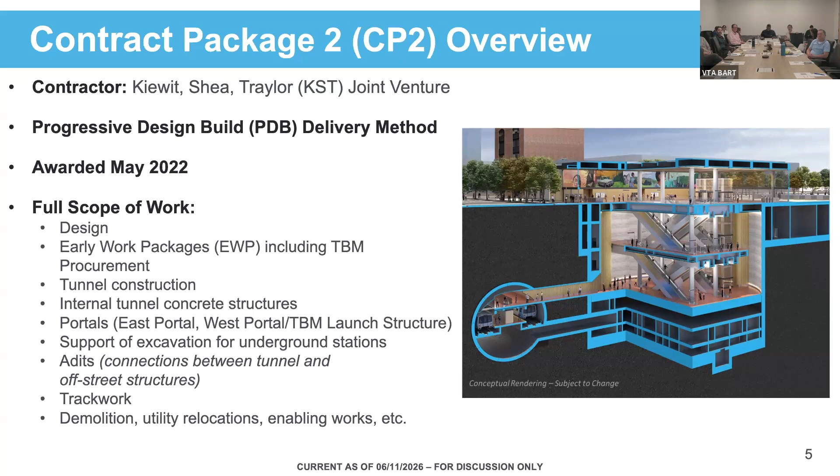Initially we awarded this contract in May of 2022 for a very large amount of scope. All that you can see there constructs everything highlighted in blue in the cross section on the right side under a progressive design build contract.

Over the last couple of years, we've reported out here, and just to reiterate, there's several activities that have taken place tied to this tunnel contract, starting with a contract task force that was requested by the board for the program to establish as we were negotiating our price for the lump sum price for stage 2 for the construction of the tunnel with KST.

Our prices were far apart. We, in addition, completed industry outreach to understand from contractors what scope they would be interested in if the full CP2 was repackaged. It culminated in the recommendation to the board to off-ramp the KST and to seek a new tunnel contractor while they continued the work of the launch structure that they're working on right now.

In August, we held an independent peer review with representatives from Sound Transit and LA Metro who highly encouraged us to try and go back to KST and make things work. In addition, KST came back and said they were interested in continuing conversation. And so all the while that all of this was happening, the West Portal work has been underway, going really well, on time and on budget.

As things were going well and the cost was our only challenge with them, we started more serious conversations, which also has led to additional early works activities that we've been talking about and are going to be advancing to help manage the critical path.

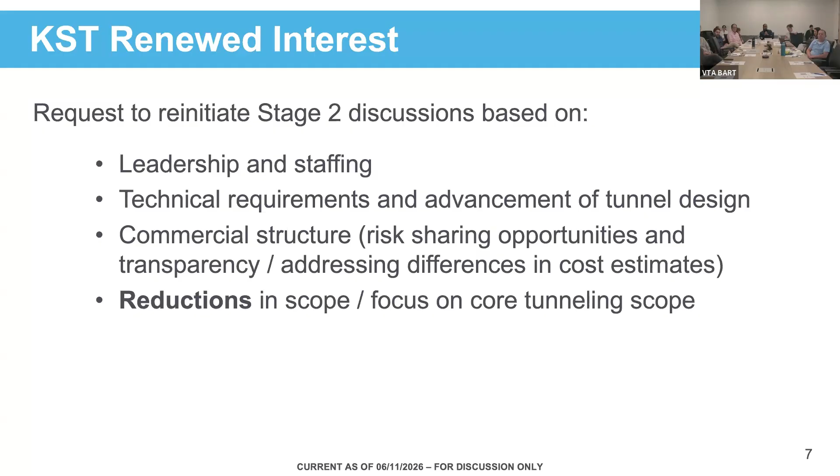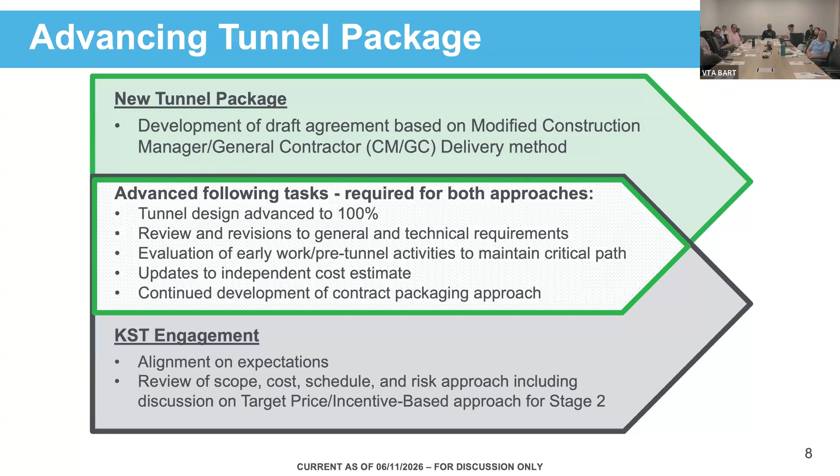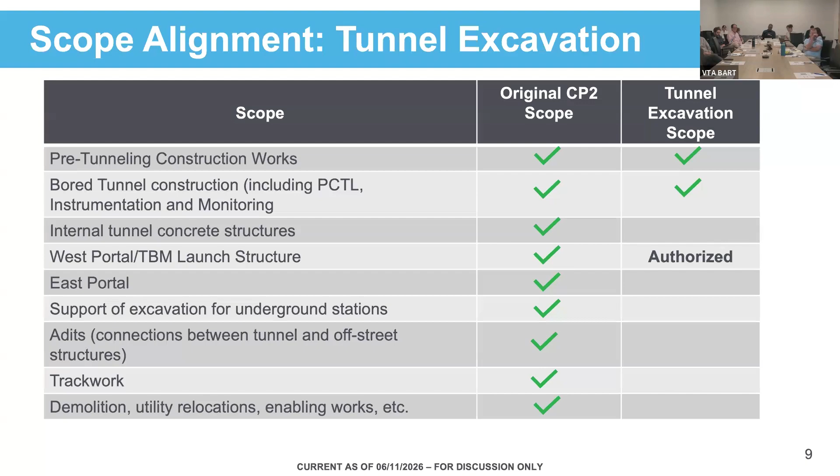So this new commercial structure, target price incentive based, has a number of benefits to VTA. There's typically a lot of risk with underground construction under a lump sum model, and this risk is priced in as contingency, increasing the overall cost of the job. With this target price, the risk is not priced in, and VTA only pays for it if it occurs. So this contract has a pain share and incentive-based gain share element to it. Basically, a portion of their fee is at risk, and they're only eligible for it if they're able to meet key performance indicators on cost and schedule and a couple other items.

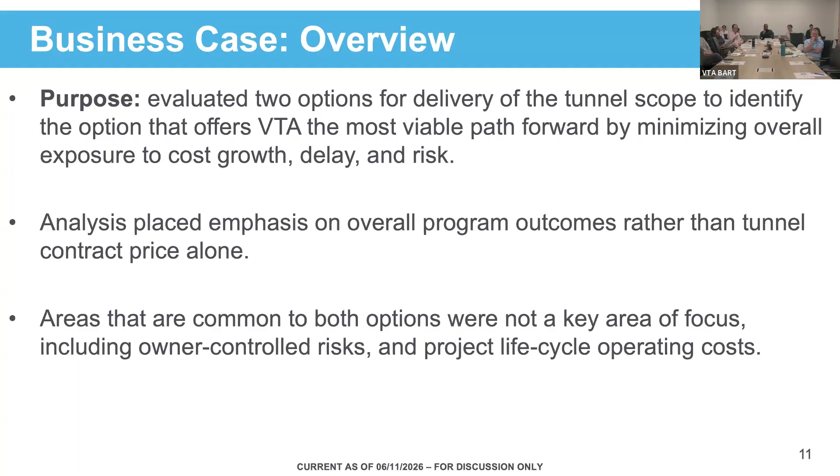So looking at this, to determine the best path forward for the program, we did what we call a business case, evaluating the two delivery paths: a new tunnel procurement or an amended and restated agreement with KST. This analysis included cost, schedule, and risk, rather than just cost alone. Because the tunnel is on the program's critical path, the decision must reflect total program impact, not just the contract price of the tunnel alone.

So here are the two options considered: amending and restating the agreement with KST under a new target price fixed fee incentive-based commercial model, or bringing on a new tunnel contractor.

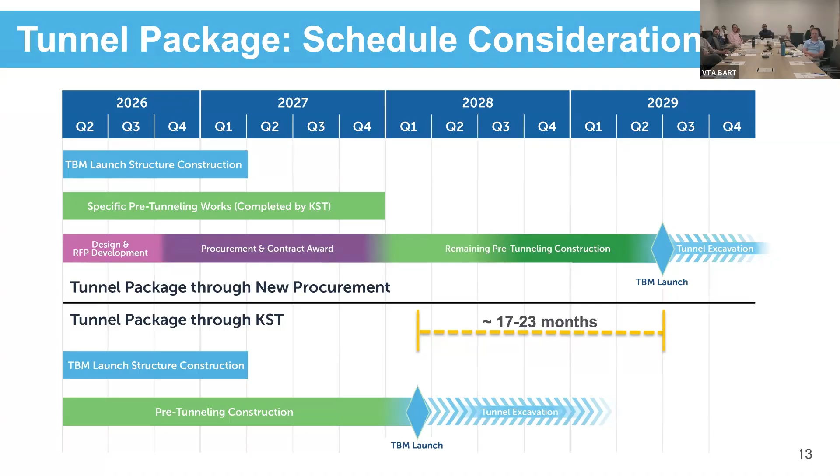This came into consideration. A big one being VTA would have to take on the liability of providing an owner-furnished tunnel boring machine, because KST has procured and designed the tunnel boring machine for their job. VTA paid for it, but they are owning the machine, so if we were to off-ramp them, VTA would need to retain ownership and take on the additional risk of another contractor using that machine.

So these were all things we knew about, or many of them, when we went into the off-ramp, but at the time that's what seemed like it needed to take place. As we're evaluating now, the tides are turning a bit. We've come back, and this basically summarizes what the business case concluded.

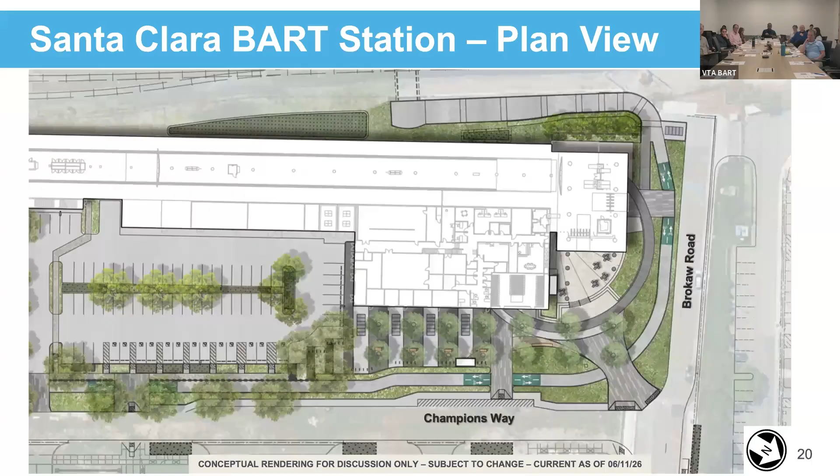And again, we heard from the group that part of one of the elements of our design is really to have a signature tree in that plaza, and the location of that tree. We presented a couple different options last time we met. We're still evaluating that a little bit. We want to make sure we get the improvements on the pavement and all the ground areas delineated and a bit more advanced before we bring that back to you. So we'll be doing that next month, and I believe that's going to be on July 23rd. So we'll have a little more integrated feedback for the group to take a look at.

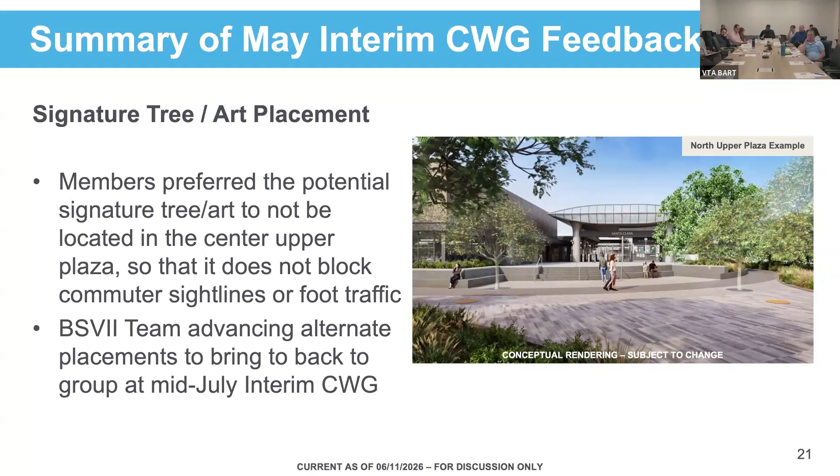Also looking at maybe where some of those art locations could be. I know we talked about some of the medallions and things like that, so we'll have further discussions on that next month.

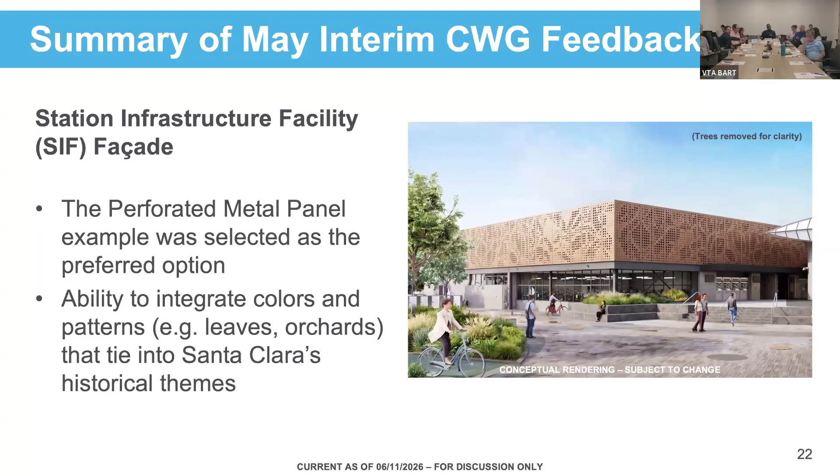Same with the perforated metal panels. We did show this one — this was kind of the preferred option by most folks. We did get some varying opinions on whether we wanted that perforated panel to stand out or whether we wanted to go with the flat metal panel. So appreciate everybody's feedback, but we will come up with a couple different alternatives to this perforation. We have time to facilitate exactly what those perforations are. This was just a sample, and again there's a lot of different ways to go about having that standard integrated insulated metal panel with some perforations and design elements in it.

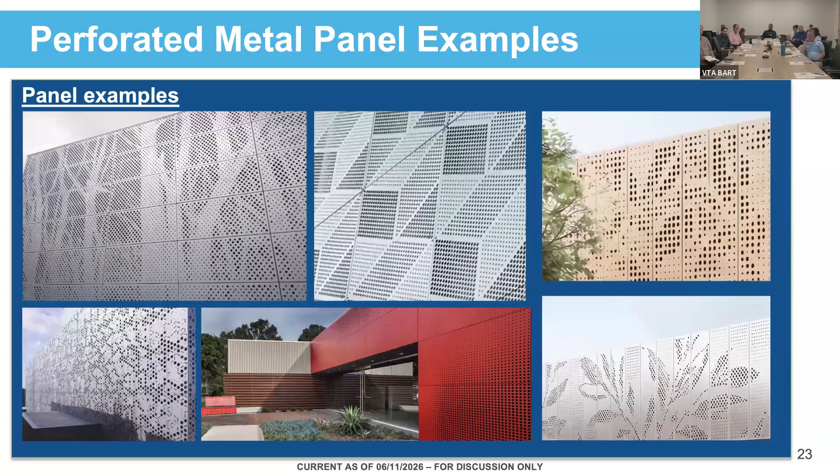On the left side, the four pictures are existing facilities, and on the right side there are a couple different renderings. The original rendering we showed on the right is kind of that golden area, and then we started to look at some alternatives in terms of color as well as pattern. That's the lower right, to maybe bring in more of that natural leaf motif that we've been working with the group on.

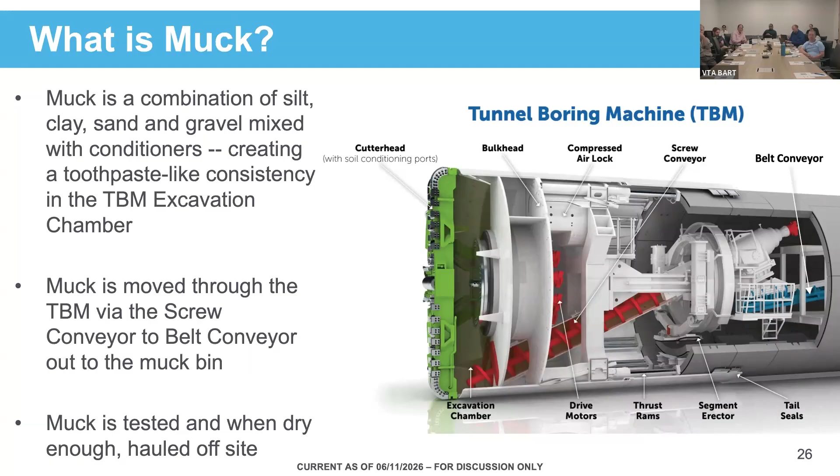Then it goes onto a conveyor system back into the yard in what we call a muck bin, where it's stored before it's hauled off. I don't know if I know how to get these to play.

So there's a couple examples here, two short videos to see how the material will move. On the left, that's very typical of how the material would move. You can see the material is somewhat dry in the left example. If you run the other one, that's a little pastier example of material, how that will come out. So that's what the machine creates and then takes to the muck bin.

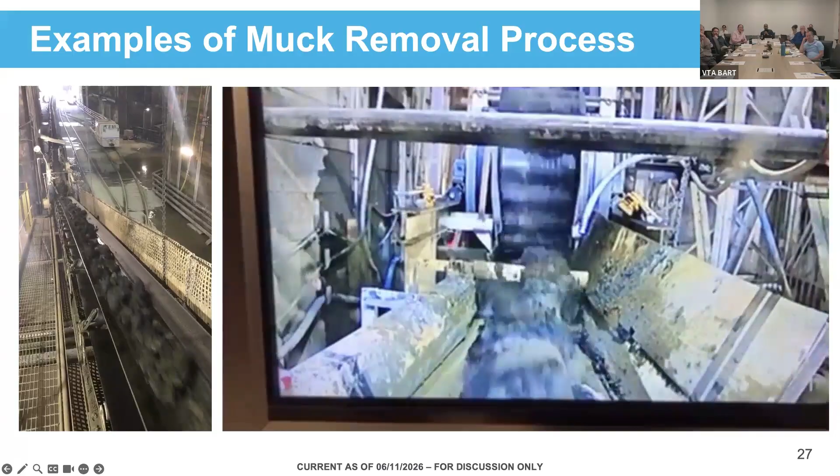Right now, and historically through the environmental document, the assumption is it'll all be hauled off by truck to landfills or quarries. That's the base condition. We know we can do that. That's been environmentally cleared, and that's kind of the ground level simplest way to deal with this.

We are pursuing options to make sure we have alternatives and looking for a more efficient way and perhaps less costly way to move the muck. So we'll talk about some of that here.

So one is just to reduce what's called the tipping fee, the fee to dump the material wherever we take it. We've been working with what are the former salt ponds out in the Alviso area, and we've had some good success there. We'll talk about that, but they want material very badly out there to restore the ponds to marsh area for both environmental purposes as well as flood management and management of sea level rise out in that area. So the regulatory agencies are very interested in this material to fill those ponds up.

We've also talked with two quarries in the area, Stevens Creek and Lehigh, otherwise known as Permanente Quarry, over the years, which are both up in the foothills above Cupertino. So we've been talking with those two entities.

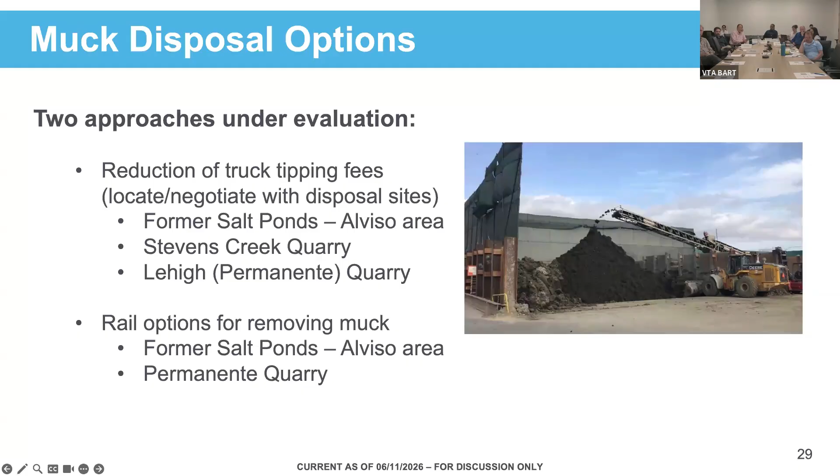And then we've also been looking at rail options for removing the muck. The rail options are really applicable to the salt ponds, the former salt ponds, as well as Permanente Quarry, which has historically used rail quite a bit over the many decades they've been operating up there in many different arenas. So the rail still goes there, and they still have quite a bit of space up there. So those are the two opportunities that we've been pursuing and talking with the different entities for quite a while now.

Just to get you some perspective of where they are relative to the project, the project is the blue line at the bottom. You can see on the left where the Newhall Yard is, that's where we'll be generating the material. In this exhibit, we show the ponds areas. As you can see, there's a lot, they actually circle pretty much the whole bay, the South Bay anyway. We would be looking at A4 at the very bottom left, A8S, A12, and A13.

We have 4 million plus cubic yards of material that will be generated by the boring machine. That is more than either A4 or A12 could handle combined. So if we take all the material up there, we would need A4, A12, some of A8, and some of A13. And we're working through where the best place is. There's different ponds, areas that have different status relative to their post-use conditions. And actually the different entities are kind of talking up their need, so we have some competition going on up there for the material.

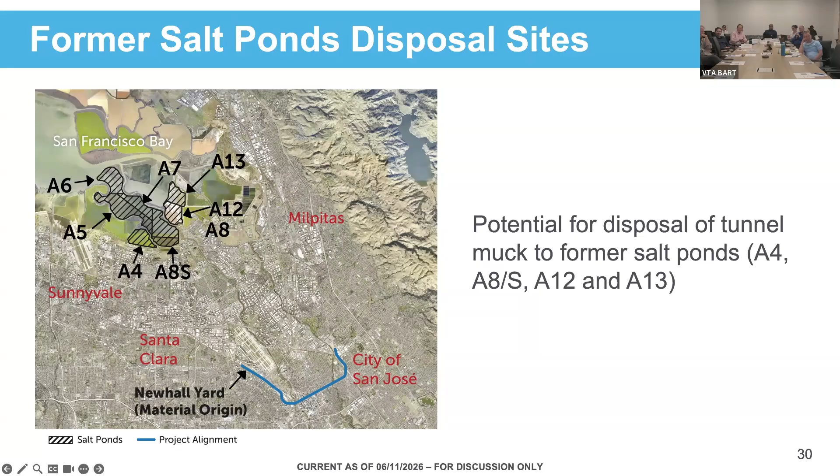In terms of the overall, it's a whole different environmental process that we're going through for the beneficial reuse of the material. That environmental document is well underway. We're looking to wrap that environmental document and get environmental clearance to put the material in those former ponds next year, mid to late summer of next year.

We did get approval from the regulatory agencies. We did quite a bit of testing all along our proposed alignment for the tunnel, tested that material, and then did some additional tests with the conditioners that are added to the soil, and tested that. We got letters from the two primary environmental entities that they would accept the material in the ponds. That was really good news. We got that in the last couple months.

So at a minimum, we'll be able to truck the material there. We are now testing for if we do rail movement of the material to build spur tracks up right next to ponds A12 and 13. In order to build the rail spurs there, we have to remove some material and then build up from a solid foundation to place the rail spurs. We're testing that material with the hope that we can just take it out from where it is and put it directly over a levee into A12.

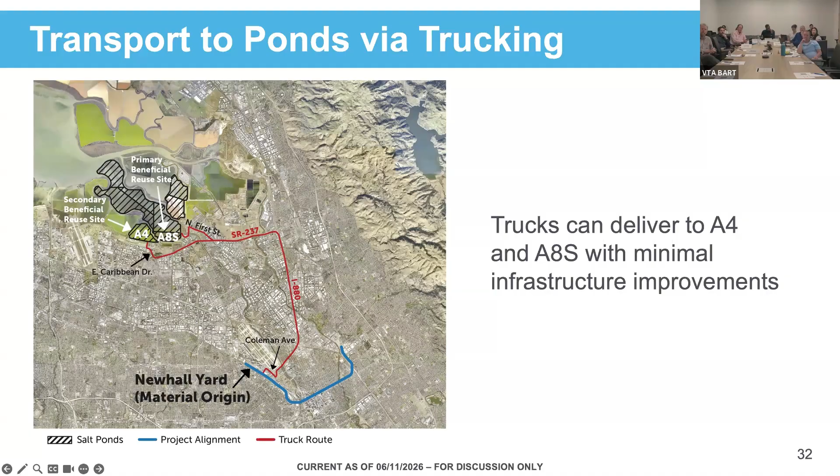If we did it by truck, primary locations would be ponds A4 and A8. A8 has a lot of capacity for it. So if it's by truck, we would be putting a lot of the material in A8, A8S.

The rail spur you can see here follows the existing line. We use the existing UPRR line where a lot of trips are made currently for both commuter and freight along this line that heads right up the East Bay. It runs immediately adjacent to A12 and 13. That's why we're looking at the spur right next to that. So we would have spurs at Newhall and spurs at Alviso. It's about a 6.5 mile route. And from there, we would put most of the material in ponds A12 and 13.

If something prevents us from doing that—it could be weather, breeding season, something unknown comes into a certain area—we could, with a very short, less than a mile route from there, still take the material by rail up to that location and then truck it less than a mile over to A8. So it still keeps a lot of trucks off the freeways and off the local roads close to the project.

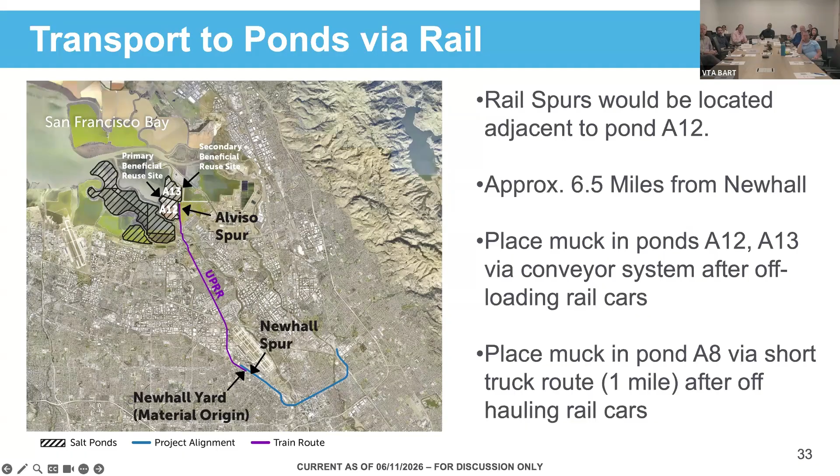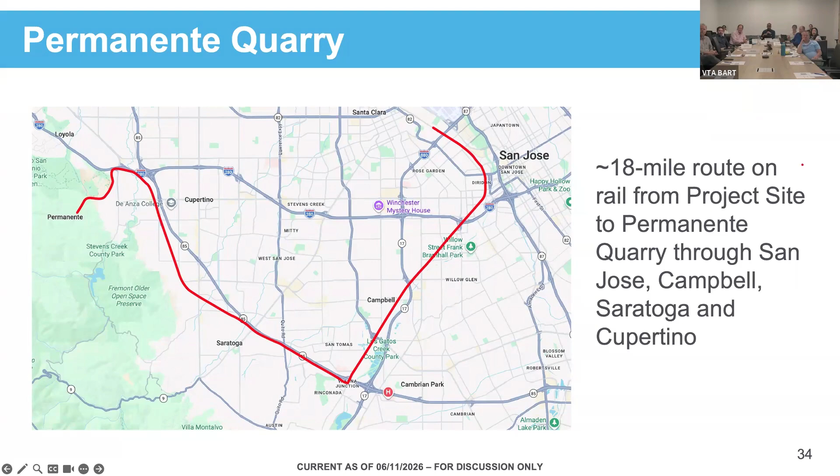The other option is the Permanente Quarry. This shows the rail line as it heads down south, roughly following 880 or 17 till it gets south of 85, and then it heads west and up to the Permanente site. So that's an existing line. It's been there since I lived in Cupertino—well, let's just say decades ago.

We are hiring, we're going to bring on a rail designer to design the spur tracks. That process is well underway. The interviews were held earlier this month. We will go to the board in August for approval of the contract with the design team. And then we'll set off on a quick pace to get the designs done through and approved through UP, and work through that design process to get that ready for construction for the spurs at both locations.

The intent is to lease rail cars. There's options as to who actually would be doing that leasing, but they will be leased. Right now the idea is there'd be two sets of rail cars in use—one would be at Newhall Yard, one would be out at the ponds during the day. They'd be loaded at the Newhall Yard site.

Pretty much all day long they'd be loading, and then that would be taken up and dropped off at the pond site. By that time, while we're loading the cars at the Newhall Yard site, we're offloading the cars at the pond site. And then we take the rail cars that are loaded up to the ponds and bring back the empty cars to Newhall and repeat, basically on a daily basis. So that's our plan right now, working with UP on the right times to do that and all the other requirements we'd have to get cleared and agreements we have to get in place to make that happen.

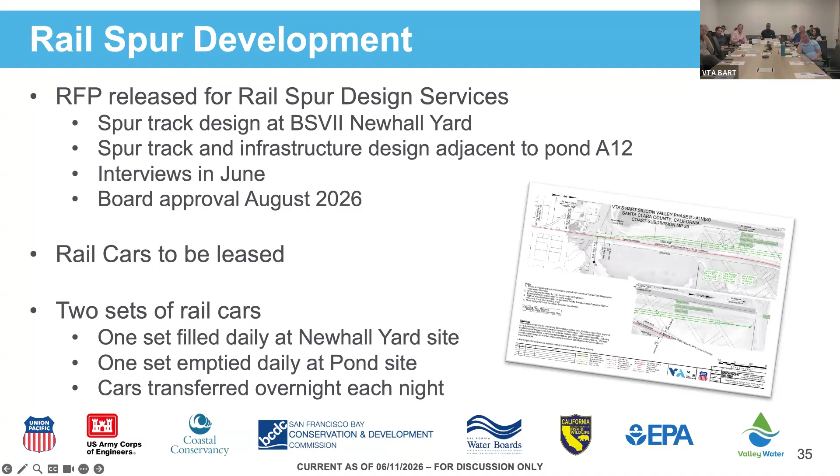This shows a little bit more detail on the improvements out at the A12 pond. Again, on the left is the line we showed before going from the project up to the site. A little detail on the right shows what we call the impoundment area, which is just to the left, or west, of the railroad line, where we build the spurs, the pink magenta color. And then we take it right over the levee into pond A12, which was right there on the left. Just up off the screen is A13.

Even A12 by itself would not accommodate all the 4 million yards of material that would be generated.

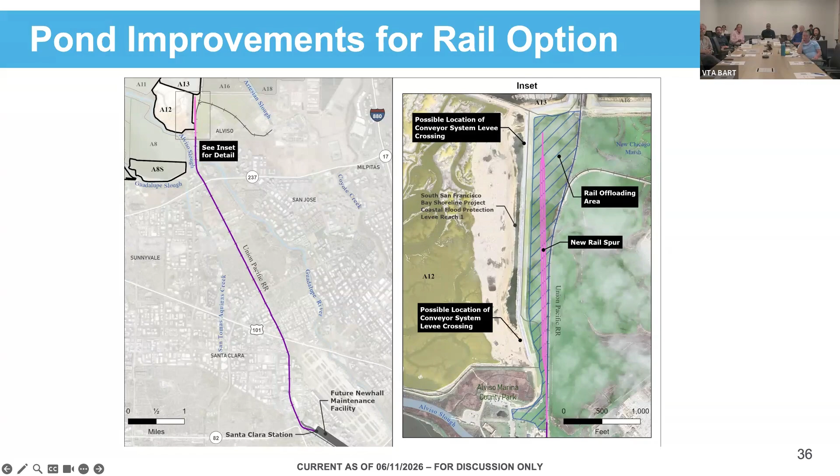This is the location, roughly. We have a lot of work to do working with KST on where their muck bin is going to finally be and how our spurs are located. But basically it comes off the last UP track in the yard area there and comes into the site, and that's where the spur tracks in green are shown on this exhibit in the Newhall Yard.

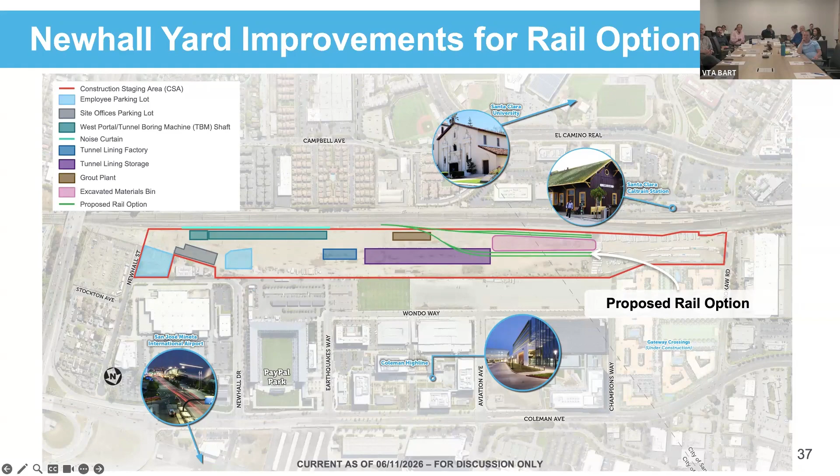So that's all the work that's going on. As I said, we've completed the material testing. The environmental document is ongoing, and the designs will start in earnest in September. We expect final design to be done in April of '27. It's fairly straightforward rail design. Environmental clearance is expected summer of next year.

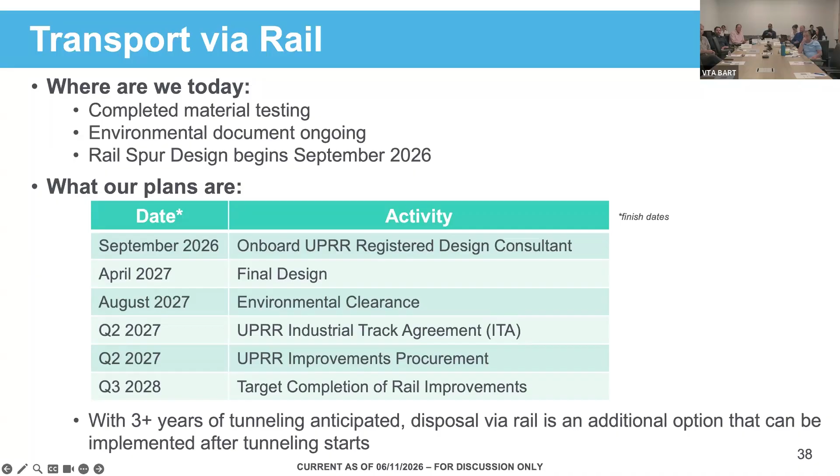And then in '27, we also get the industrial track agreements completed with UP, and we can start the UPRR improvements once those agreements are in place next year on the site, on the Newhall site. We expect those improvements complete at both sites in 2028. Our schedule does not fully align with the start of tunneling operations, but because it's 3+ years of tunneling operations, it's still very worthwhile that we're offset by a few months in terms of when the rail will be in place versus the starting of the tunnel operations in Q1.

So kind of already talked through this. We will be getting the environmental clearance, UP and Permanente Quarry discussions continue ongoing, and the construction, as I mentioned, and coordination with UP. So a lot to do in the next 2 years for this work, but we're encouraged by all the conversations we've had and the work we've done to date.

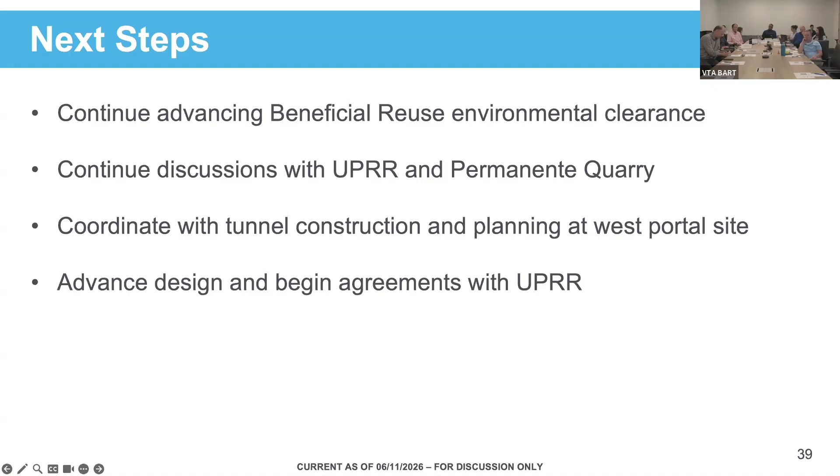Okay, I have a couple questions and I'll just kind of ask them as I go. The first question I had was about how many trucks per day and what hours will they be running before the rail is available to do that transfer at night?

We're looking at generating on the order... we don't know yet how many there'll be. It's a range. We don't know what the production is actually going to turn out to be, but it'll be hundreds of trucks that'll be needed to move the material, per day.

Just want to make sure you know, as we advance this further and get further understanding, we'll be developing a construction transportation management plan for all this work, similar to what we did a couple of years ago for the work that's occurring now at the West Portal. So we'll be bringing you proactive updates as that advances further, and you will get further clarity on it.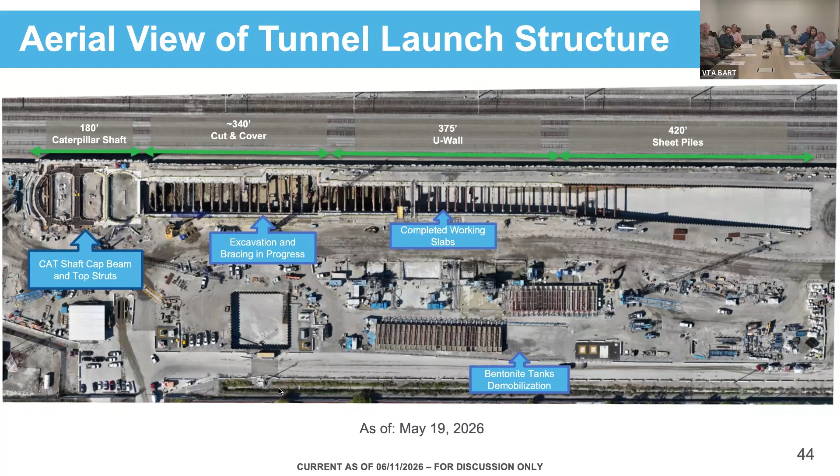At that point in time, we had just poured half of the cap beam, which is the structure that sits on top of the Caterpillar shaft, tying together all of the diaphragm walls. You can see the right-hand side had been poured. The left-hand side was still in final rebar preparations, and that's since been poured a couple of weeks ago.

I'm going to take you inside the excavation now. On the left is a photograph from our third level of bracing. So we're using pipe struts, connected to walers on either side of the excavation. They're actually preloaded, so there's hydraulic jacks that exert pressure on these struts, pushing back against the soil that's pushing against the structure from the outside. Then there's shims placed to ensure those struts are doing what they need to do. You can see on the bottom, the walers are in, but the struts are not yet in place.

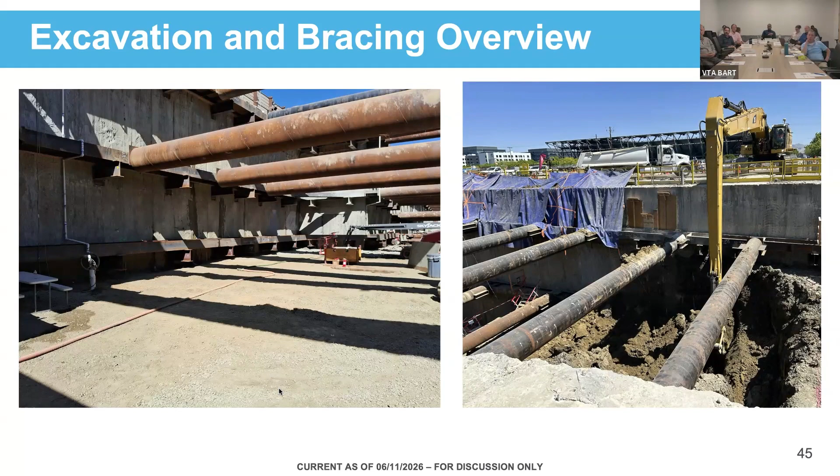The level above, the struts have already been preloaded. Once the struts are preloaded, that allows the team to excavate the next level of excavation cut, which you're seeing then in real life on the right-hand side picture. So that's the excavator I was talking about earlier. It's called a long reach excavator for obvious reasons. It's got a very long reach on it. You can see the truck there just adjacent to it, ready to receive the soil, which comes out very loose material. You get about 4 or 5 buckets that fills one truck, and then the next truck is lined up behind it, and off we go.

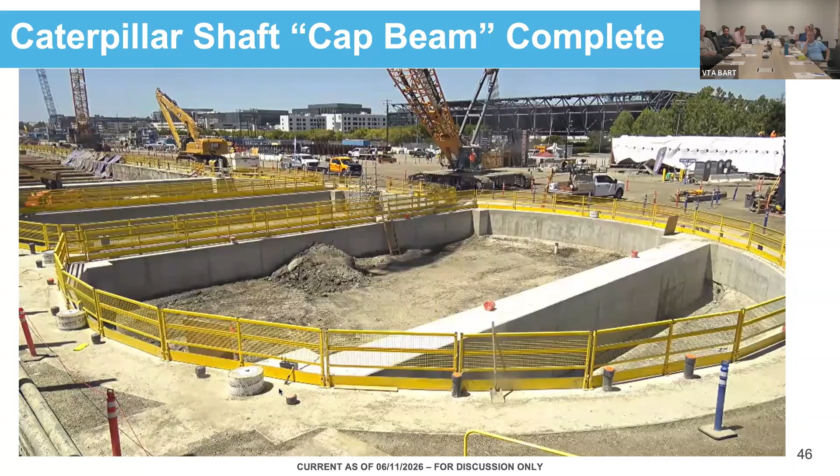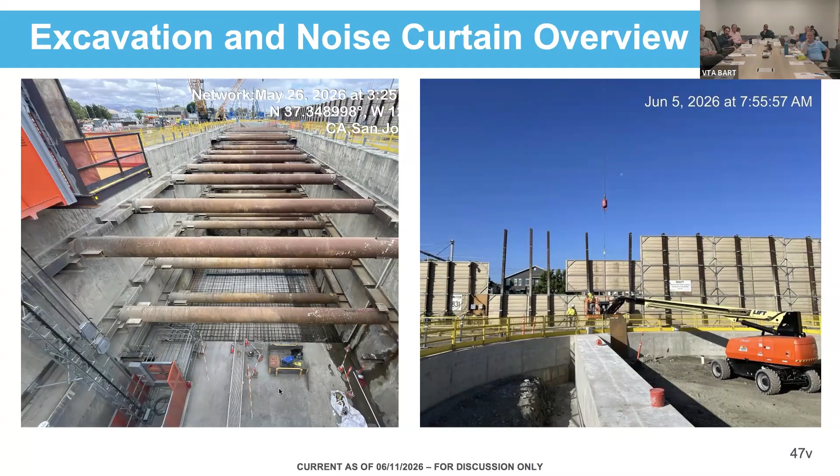There will be some additional preparation within the structure itself. The Caterpillar shaft needs to get fitted out with a launch structure, a cradle, a head wall, and eye seal. All of these are required for the machine to thrust off and commence its tunneling process. We will also begin constructing the tunnel lining factory.

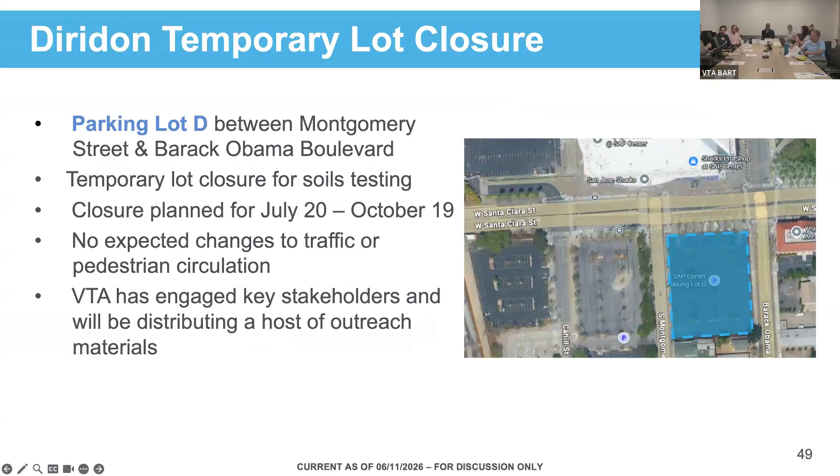Thank you both. Any questions or comments? So, you're constructing two substations to the south, and are they permanent fixtures to juice the system, or just for construction? Just for the tunnel boring, for the temporary construction phase, yes. The permanent facilities will also be on the same site. We're working with PG&E to get all that power set up for the TBM, and that same site will then be refurbished for actually powering the BART trains.

Is there any noise related to that, bracketing, clicking and all that stuff? There would be a transformer hum potentially, but I don't think it'll be any different than the PG&E substation that's already out there on the other side of the 880. We don't hear that because it's not our neighborhood. Well, this PG&E substation is actually on the north side of 880, and there's a lot of PG&E equipment there, so we're essentially putting in some gear right on the other side of the fence. It's really not going to have anything that you notice.

Also, you had mentioned it was the underground structure - what's the one all the way to the south? The Caterpillar. So the tunnel boring machine will come in down your concrete ramp, right? And then start in, or are you going to drop it through the Caterpillar? A lot of the major components will get lifted down through the Caterpillar.

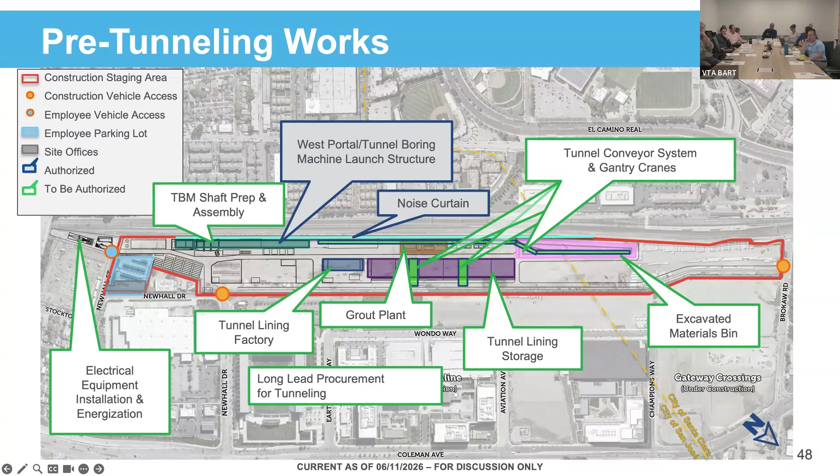Hearing none, we're going to move on to our last section, just a brief set of next steps to keep in mind. As mentioned, there will be an interim meeting in July, on Thursday, July 23rd, happening in this very location. Beyond that, we have two regularly scheduled quarterly CWG meetings for the rest of 2026: September 17th and November 19th. As those dates approach, the details will be confirmed. As always with Santa Clara CWG, the location will be this very one.

Beyond that, there is a VTA Board of Directors meeting on Friday, June 26th, 9 a.m. That will happen at the County Building, West Wing, at the Board of Supervisors chambers.